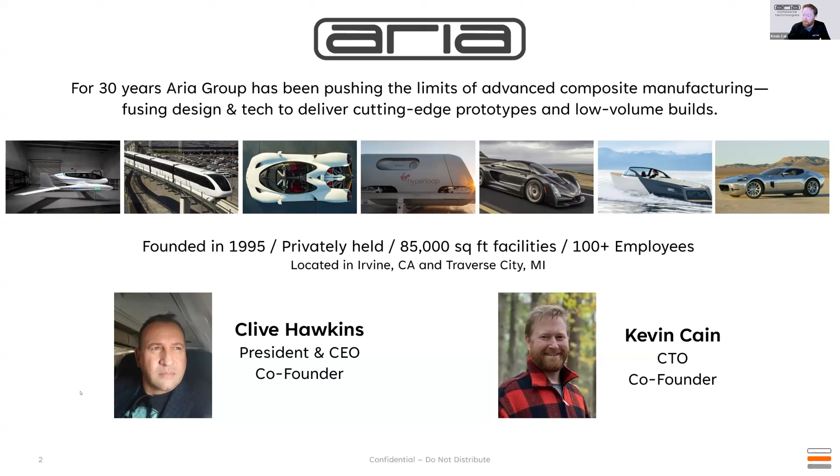Before I jump into what ACT, Aria Composite Technologies, is up to, I want to give everybody a little background on Aria Group and what we've been doing for the past 30 years.

In 1995, we founded, through Clive Hawkins and myself, an engineering and low volume manufacturing prototype manufacturing consultancy out there in Irvine. Some of our initial clients were like Panoz Esperante, a really interesting low volume aluminum intensive vehicle, the Rod Millen Pikes Peak race car. We did a lot of the design and manufacturing for the Las Vegas monorail. A large number of our early clients were the OEM automotive design studios on the West Coast, including the Honda SUT, Ford GR1, Mazda Furai.

Into the early 2000s, there was a lot of electric vehicle startups happening out in the West Coast, and we were a major resource and development partner for many of those firms. Really noticeable, the very first Tesla Roadster that existed in North America, we produced the body panels for that here at Aria Group. We worked very closely with Fisker throughout the years, Aptera, and again continued our close relationship with Tesla on the very first Model S hard model, also done at Aria Group.

In 2008, though, there was a pretty major setback to the automotive industry through the 2008 recession, and Aria Group pivoted. We produced a lot of interesting projects for the entertainment space, working with Hollywood out here in California. We did major big budget motion pictures, Avengers, Transformers, a number of large projects for that. But one that was really the most interesting and notable for us was our collaboration with Disney.

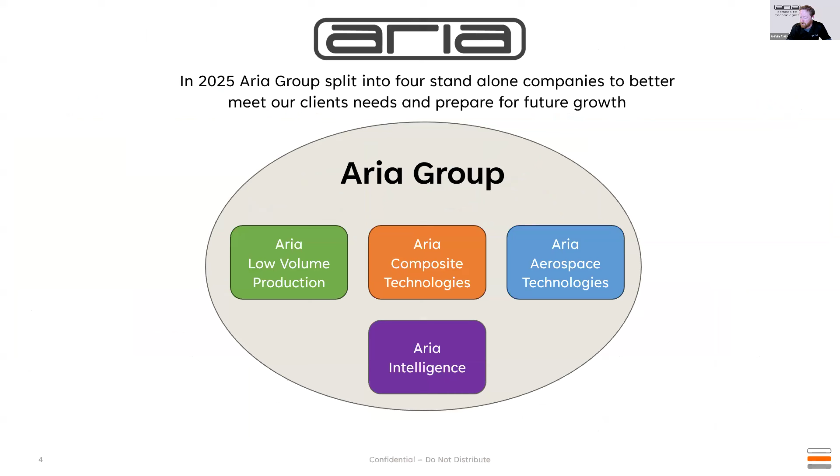So again, in 2025, Aria Group has split into 4 standalone companies to better meet our client needs and prepare for future growth. So we have Aria Low Volume Production, Aria Composite Technologies, Aria Aerospace Technologies, and all of these are backed by the Aria Intelligence, our own internal paperless communication system.

Within Aria Composite Technologies, we immediately have capabilities due to our 30-year history coming from Aria Group. So we have 20,000 square feet dedicated just to composite manufacturing in Irvine, California.

We have a large team already who's been working for decades in carbon fiber, fiberglass, hand layup, and prepreg infusion. We are very experienced in doing high quality finished parts, whether it be single runs or into the dozens to hundreds of components. We do our tooling design and manufacturing in-house.

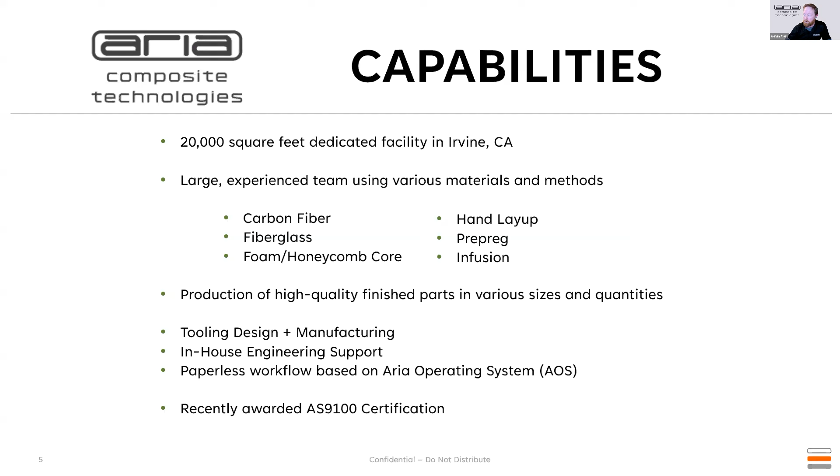We have engineering teams able to immediately provide engineering support. All of this is centered around our paperless workflow based on our operating system, the AOS. And in combination using AOS, we just recently got awarded our AS9100 certification, so that's looking to really expand our efforts in the aerospace industry.

We have like 9 5-axis mills, a CNC cutting table, and a strong relationship with Stratasys, so we have 3D printers on site. We've got a large format curing oven. We have a good sized autoclave, clean room, and a fully equipped surfacing and paint department.

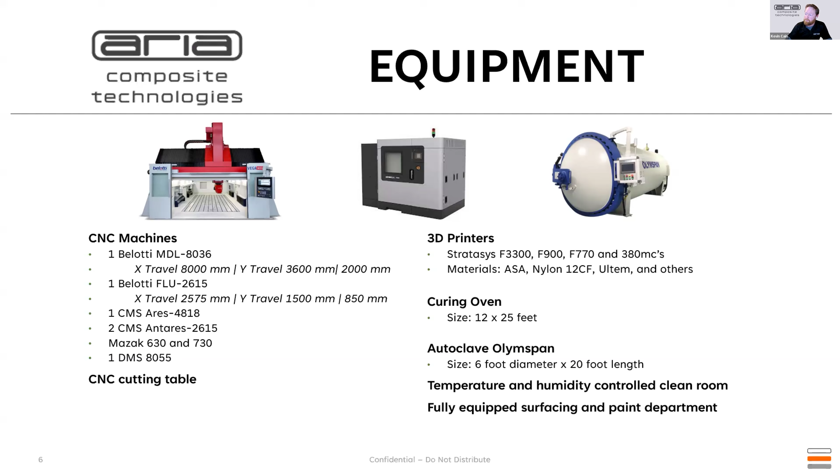But the mission of why we do this, why we've set up Aria Composite Technologies, is that our goal is to commercialize breakthroughs in composite research and development into scalable solutions that overcome the barriers limiting widespread adoption of composite manufacturing. So that's where we're really excited to be talking with other companies within IACMI over who has some unique manufacturing processes, some new technology. We really want to be your partner in finding the right clients for those and bringing it to market.

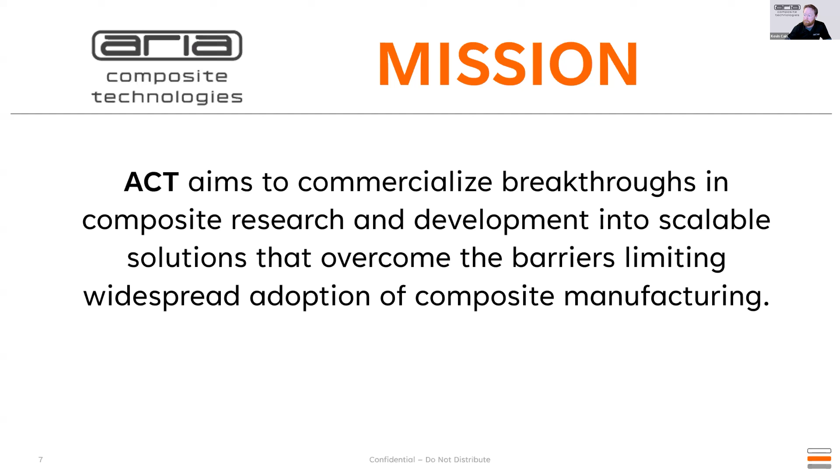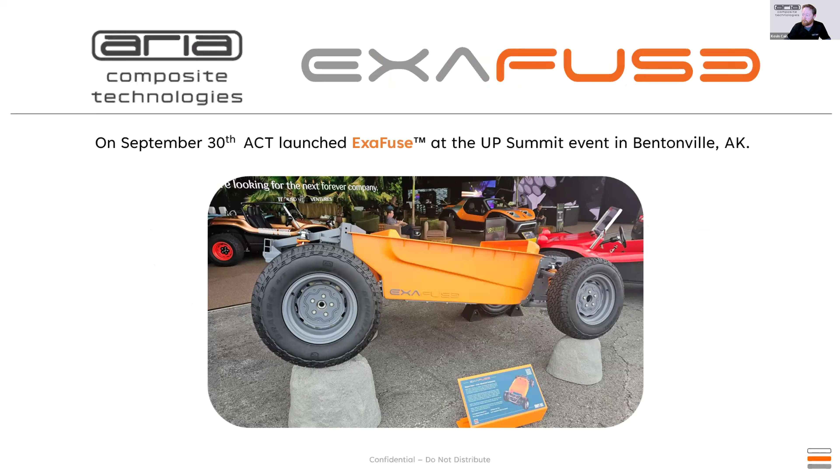Our first example of this is Exafuse. On September 30th, we launched our Exafuse process at the Up Summit in Bentonville, Arkansas. What you're seeing there is our proof of concept single monocoque tub that we produced internally using the Exafuse approach. Exafuse is just a breakthrough in composite manufacturing where we believe we're going to deliver high-rate, cost-efficient production of large integrated composite structures, leveraging ultra-low viscosity resins that provide a low-pressure, fast curing process.

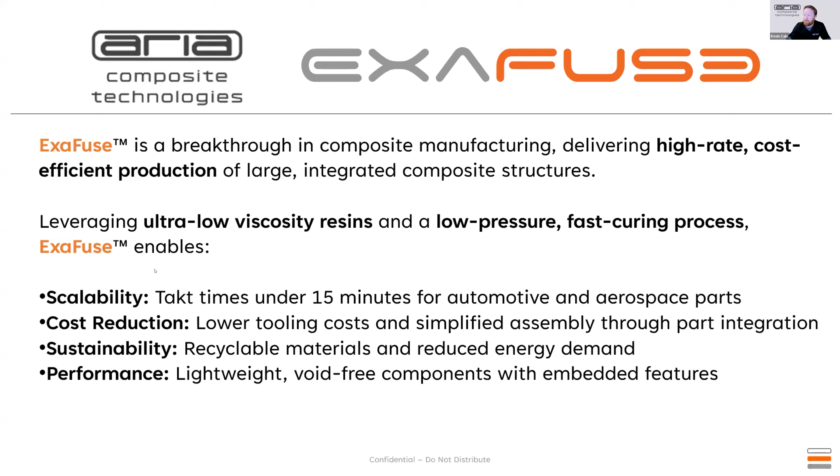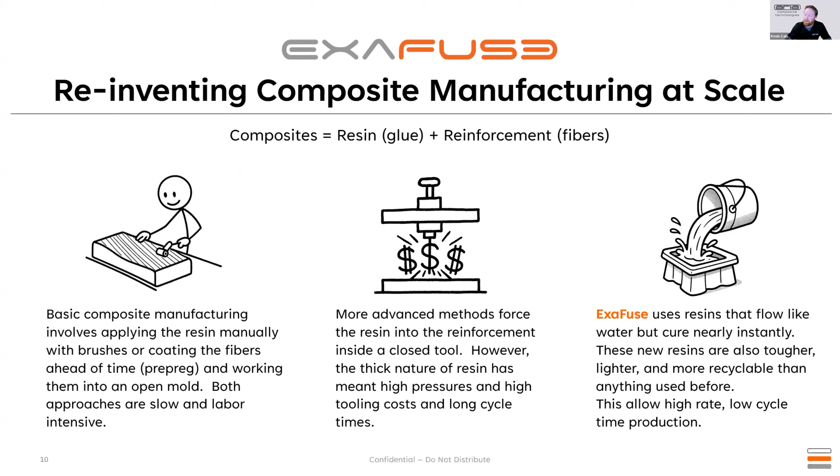They're tougher, lighter, and more recyclable than any of the thermosets that have been used before. And using that type of resin system really, what we're excited about, it unlocks true part integration. You can use these to achieve design freedoms that have never been possible before with advanced composites.

So what Tesla sort of demonstrated with the gigacasting approach of taking dozens of discrete components into a single casting, we're using that similar design philosophy to take dozens of discrete components and do it into a large format integrated composite structure, but without exorbitant capital expenditures into massive presses or tooling.

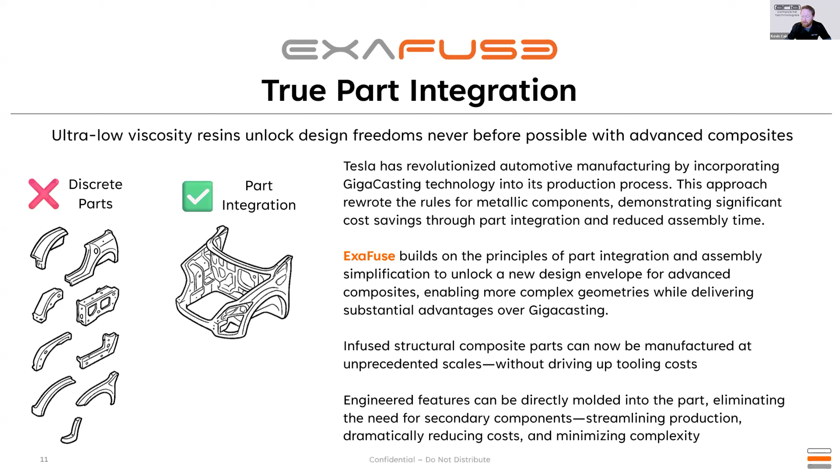And also that's unique with the low viscosity resin systems. We can do secondary features of ribs, bosses, molding clips directly into the resin system that's integrated in the same molding step as you're doing the composite reinforcement.

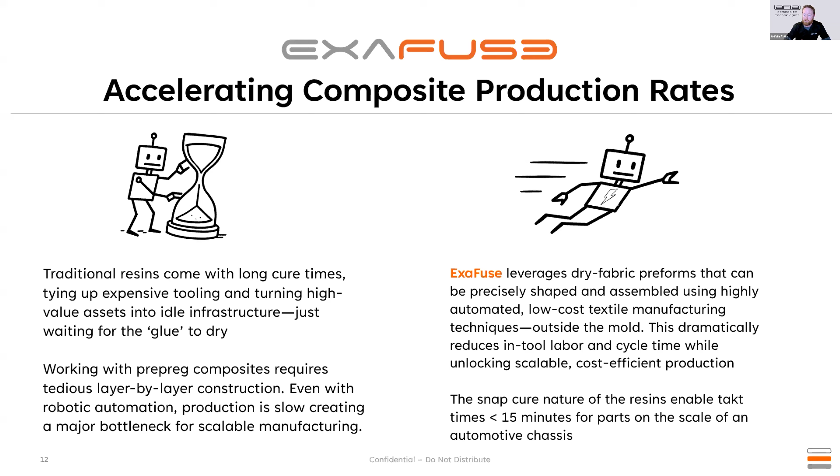So all of this is going to accelerate our production rates. We're looking to achieve production rates in the thousands of parts per year. And a lot of that's also going to rely on dry fabric preforms. That's going to be key to material handling because we're looking to have automated roboticized material handling to go through, and so the entire takt time should be under 15 minutes to produce a large tub as we saw with that initial proof of concept.

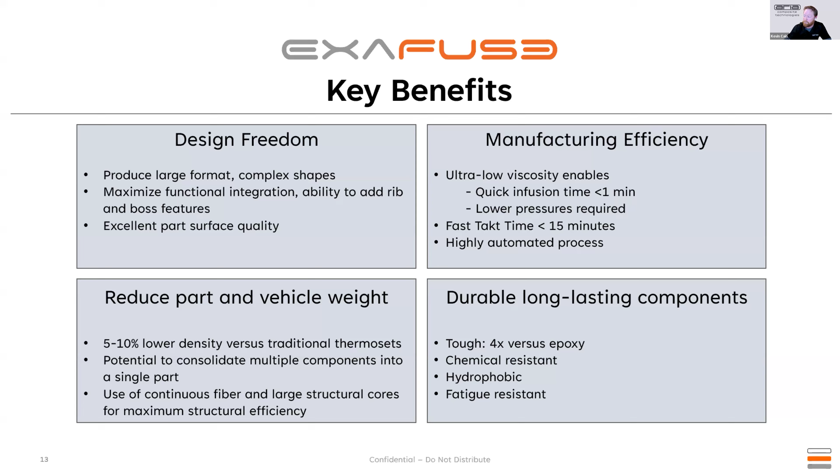So just kind of reiterating what our ExaFuse's benefits are: design freedom, really large format, complex shapes. You do achieve an excellent part surface quality right out of the mold. Its infusion times can be less than a minute. Lower pressures are required. It's a highly automated process, and it's still a very tough system. It's fatigue resistant, and so again, we're really excited about the benefits that we're seeing with this, and that's due to our strong collaboration with ExxonMobil.

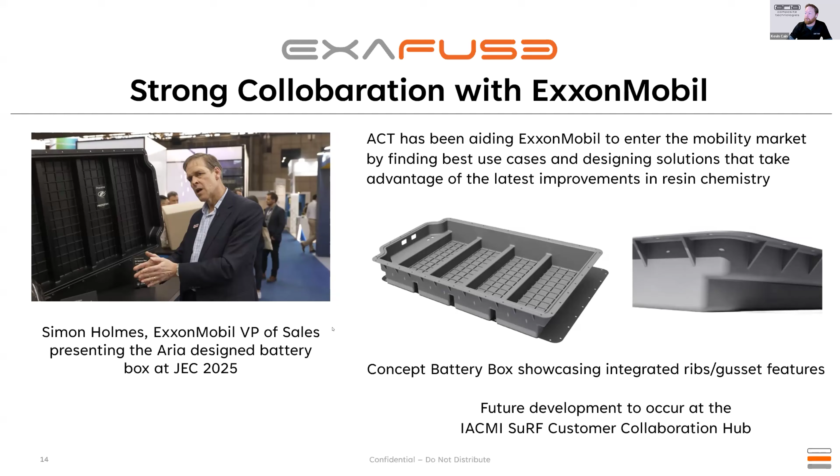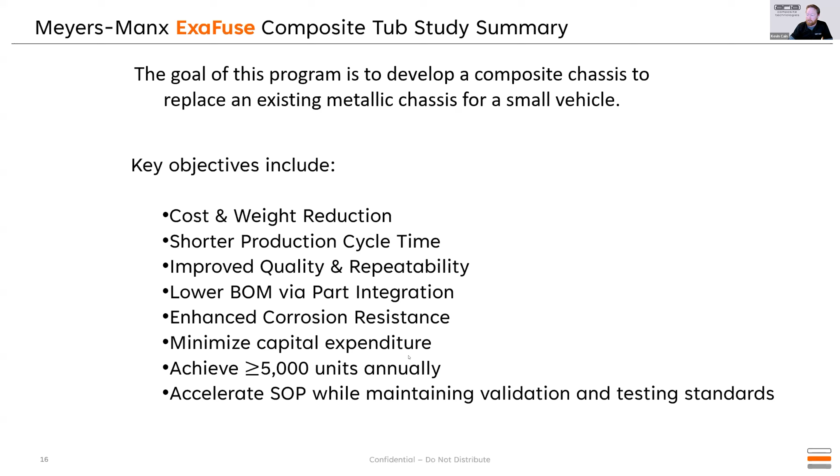Looking at the specific tub that we did for Meyers-Manx, our objectives were to reduce cost and weight for the program, shorten production time, lower BOM count, still have enhanced corrosion resistance, minimize capital expenditure was a key part of our study, and achieve over 5,000 units annually.

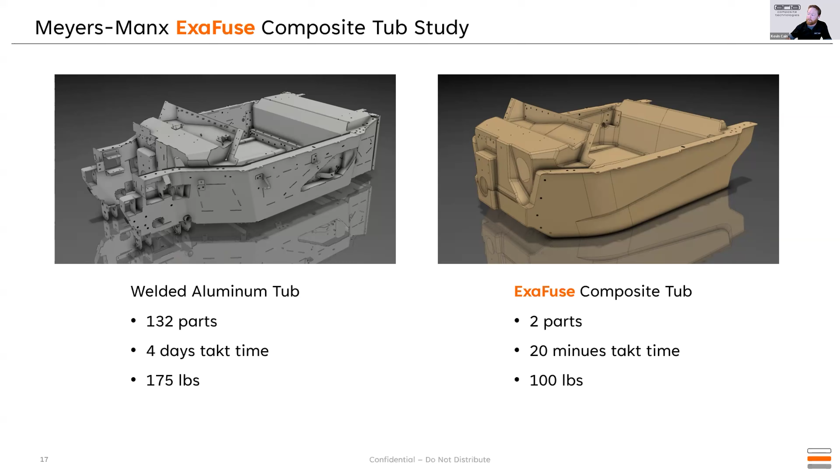We were starting with them with a welded aluminum tub. They were using flat laser cut aluminum sheets to be tabbed and slotted. It was very low capital investment, but it took 4 days takt time, a lot of manual welding, over 175 pounds. We were able to combine that down into just a firewall and tub, just two parts. Before even using our prototype tooling, we were seeing like a 20-minute takt time, and it got a weight reduction of 75 pounds. We were able to bring this whole assembly down to 75 to 100 pounds.

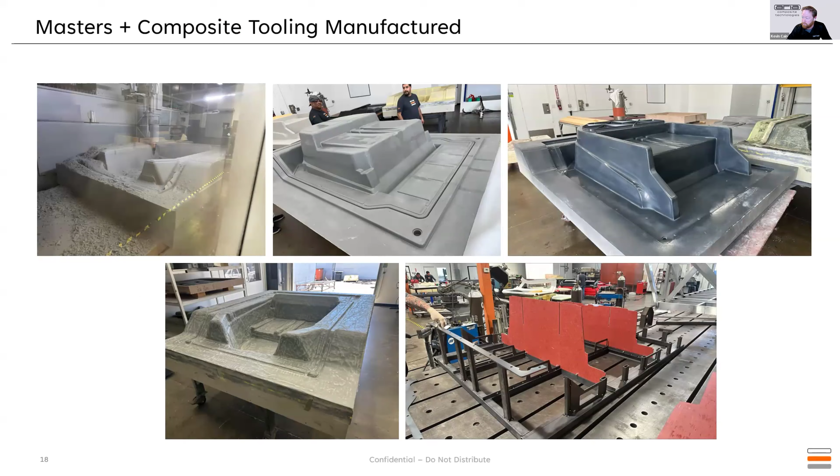These are some photos demonstrating internally our tooling process, machining the masters, polishing the masters, prepping them, to doing the composite molds, reinforcing the molds, and that achieved us this, our very first trial with the full-size tub. It's around a 15-minute infusion, and using this resin system, it requires about an hour cure, but we'll be looking at production systems which have enabled a snap cure process.

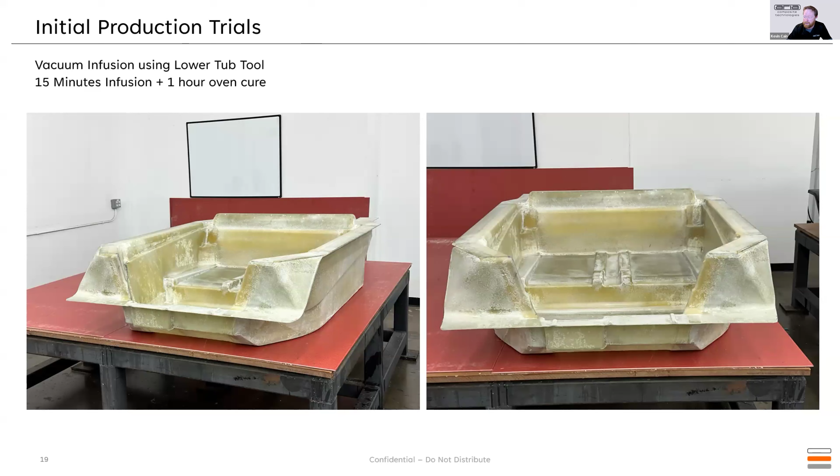Here are a few additional photos showing the finished component. This is again our initial proof of concept tub that we've done for Meyers-Manx. They're our design partner as we're working through this program. We're all very excited about the result of this.

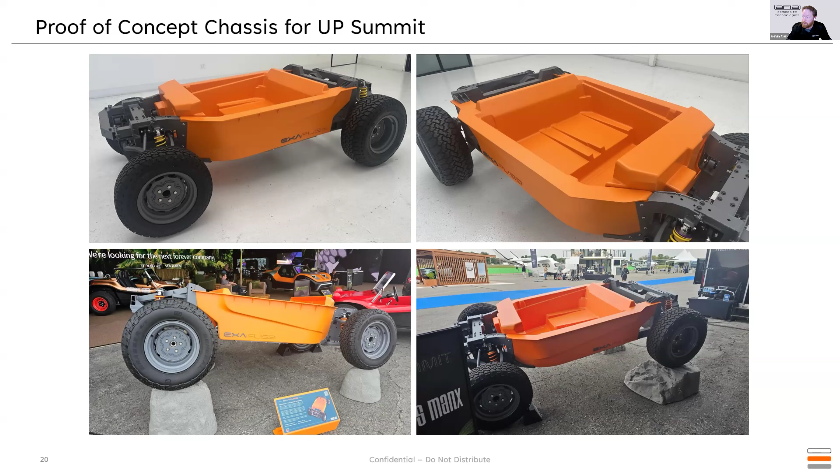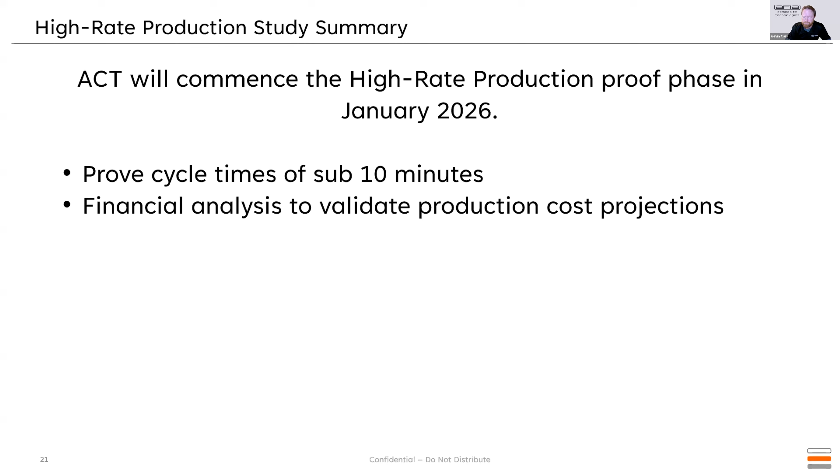Extremely, extremely promising. So in 2026, we are going to be moving from this proof of concept into a high rate production proof phase. We're going to demonstrate our target cycle times of less than 10 minutes end to end, and also have our financial analysis that really validates our cost projections.

So again, ACT is looking to commercialize new advances in composites research. I'm asking any IACMI members, anyone else out there, if you have technology that you think that ACT can help you demonstrate and bring to market, please reach out and contact me.

It looks good. We just need you to come off mute. Oh, you're still on mute, Ted. Oh, is that good? Yep, we can hear you. All right, sorry about that.

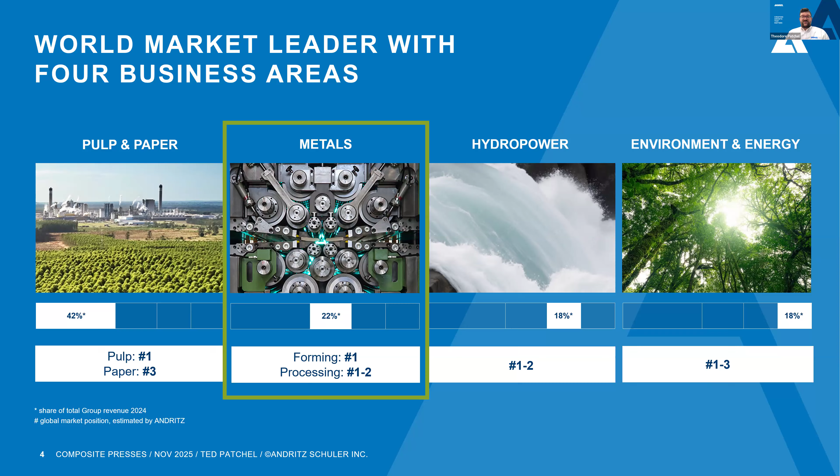What this means for us is that we have greater access to the many resources of the Andritz Group in its portfolio, which has already proven to be beneficial in advancements in both our digital technology solutions and our battery department. Andritz Group is an international technology group headquartered in Austria with a strong foothold in pulp and paper, hydroelectric power, green energy solutions, and our division, which is metals. Schuler makes up approximately 80% of the metals division and holds a strong position in the press market.

Within the Andritz Group is a vast network of companies and locations that span the globe. This includes over 30,000 employees in over 80 countries. This network has allowed us to consistently stay close to our customers and to gain additional perspectives. Within the Andritz Schuler Group itself, we have a vast network of manufacturing and engineering facilities, and these facilities and our customer relations are heavily strengthened by our extensive service network.

We offer regional service support located across the United States, and we have also recently acquired an office in Canada. This allows us to respond and deliver quickly for any issues that may arise and to support modernization projects on older press equipment. On Michigan Avenue, near our Canton, U.S. headquarters, we have a service shop that includes a pit and is capable of manufacturing and servicing spare parts and press repairs. As many of you know, our service team is currently working out at the IACMI SURF facility to reinstall that 4,000-ton short stroke press.

I will now dive into the main press designs that we have for composite applications.

While each project that we undertake is unique, the majority of composite presses that we produce fall into one of two categories. The first is a classic long downstroke press. These presses are very similar to ones that we produce for automotive stamping, for deep draw, and for a multitude of other non-specific hydraulic press applications. The second style is the compact upstroke press, the one at the SURF facility, and it utilizes a locking mechanism for the upper slide and creates the compression stroke from underneath.

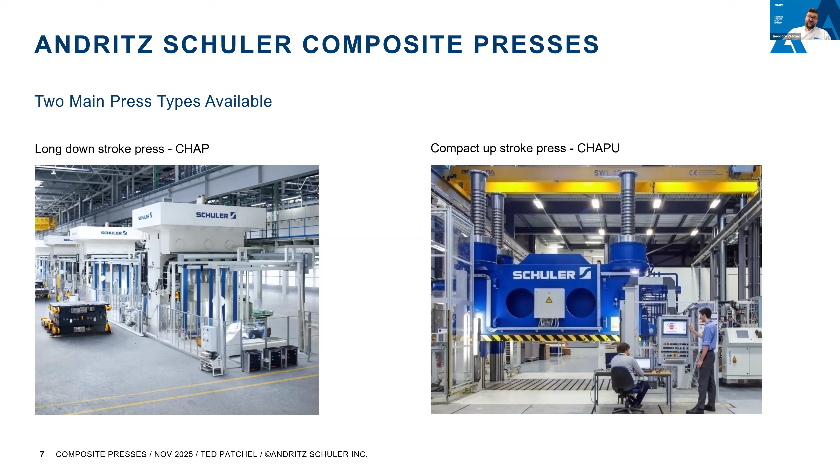Here you can see the stark differences between these two styles of press. The classic composite press on the left has a hydraulic system and the accumulators all stacked above in the crown, whereas most of this is contained in the pit on the compact design—I apologize for the cutoff section of the picture. While they both utilize slide cylinders to open and close the mold, the classic press uses these for the entirety of compression force, where the short stroke press has all the cylinders underneath. Both press styles are extremely flexible in table size and press force and can be adjusted based on the die requirements.

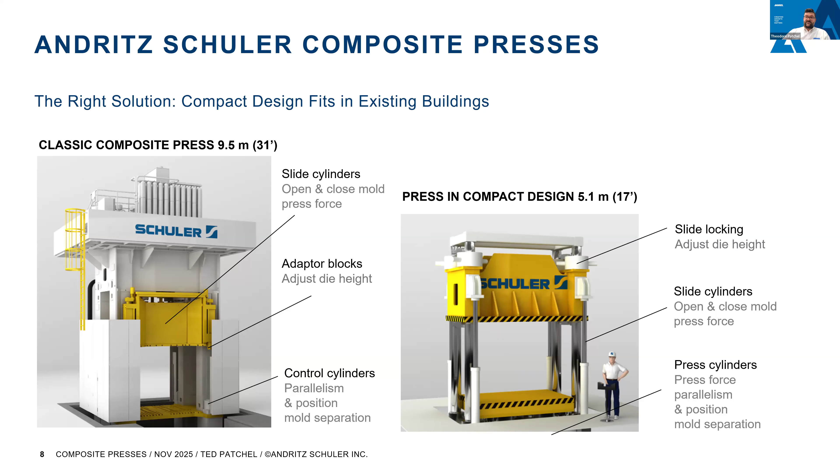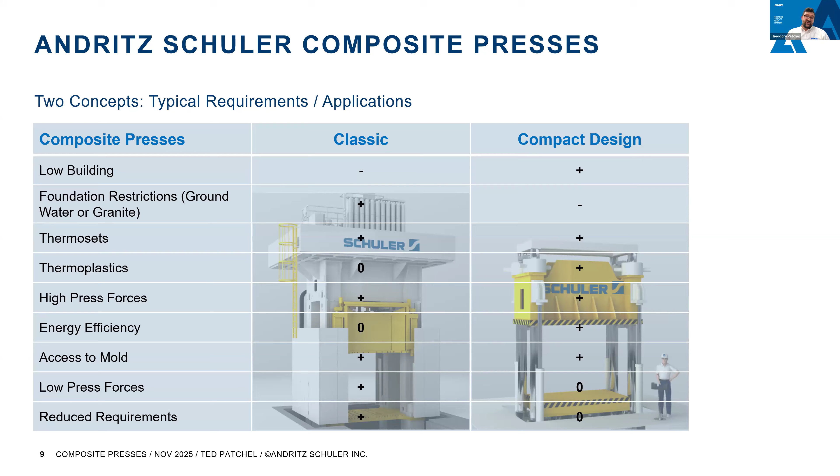Of course, both press styles have their pros and their cons. The classic functions very well over a full spectrum of press forces, but is not ideal for thermoplastic applications or in buildings with lower ceilings, as the crown takes up a lot of space. It is also less energy efficient than the compact design. The compact design functions well for both thermosets and thermoplastics due to its quick closing speed, but it does require a very large pit foundation. It is also not as efficient when you get into the lower tonnages, around 800 tons and below.

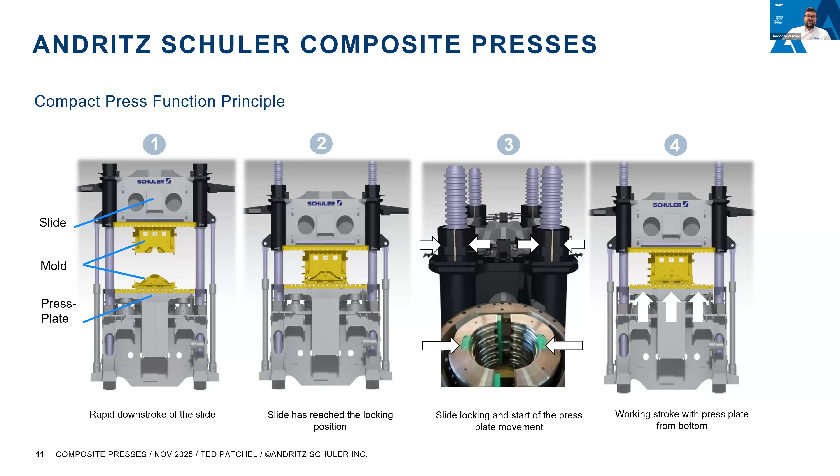Some additional benefits to the compact short stroke press are the ability to produce quality precision parts utilizing an adaptive congruent bending lines and parallelism control. The adaptive technology also allows us to change molds quickly without any additional modifications. The rapid travel of the upper die allows us fast closing speeds.

This combined with a short pressure buildup time creates a system that is effective for thermoplastic applications. Our position indexing and parallelism controls are highly precise, and adaptation is not required based on the mold's height. From an operating cost standpoint, the short travel of the cylinders creates a more efficient production with significantly less oil compression, and we can utilize selective cylinder operation to further reduce your energy costs.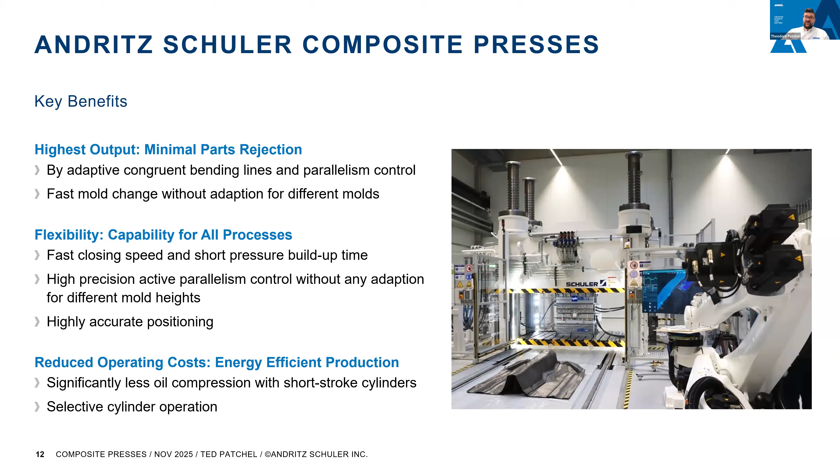Here are a few examples of some multifunctional compact presses. These are the short stroke presses designed for R&D departments across the globe. We have one in England at the NCC. We have one at Aachen Center for Integrative Lightweight Production. Of course, the IACMI press. There's an OEM in Korea utilizing it for R&D, as well as UNIST in Korea and Asglawo in Germany.

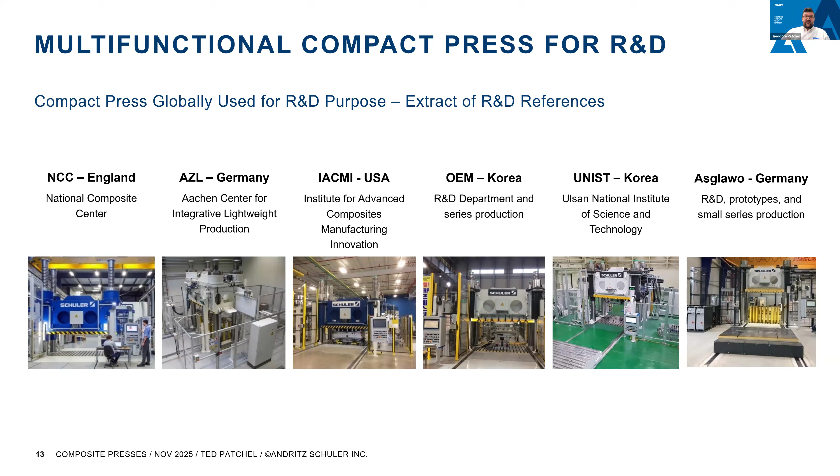Here at Andritz Schuler, safety is a main priority for us. Our builds exceed many standards and regulations, especially when combined with a mold scanner. We can create different safety zones to detect people anywhere inside of the enclosure. We also prefer to install a transparent enclosure with access doors and light curtains in place. With the transparent enclosures, it allows you to have full access and sight of the mold without putting anyone unnecessarily at risk.

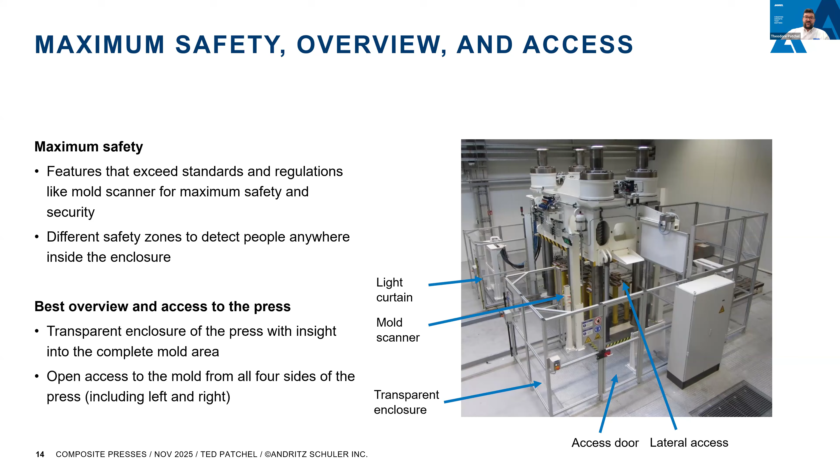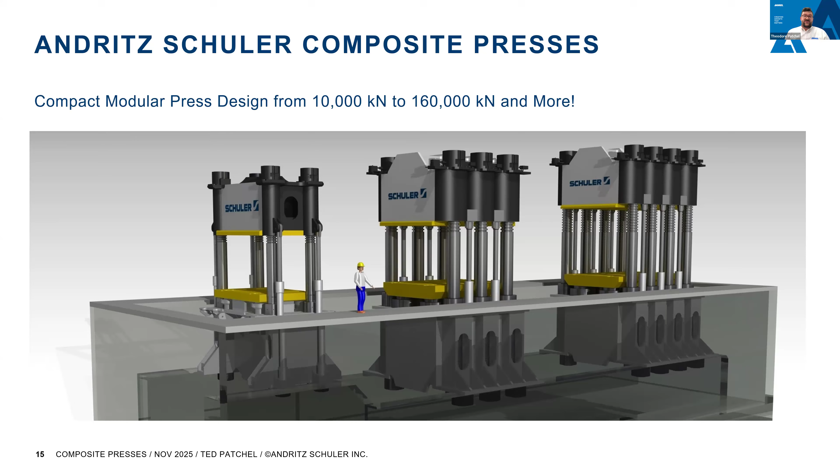Here is an example of the modular design of the short stroke compact press. Because of this, we are capable of expanding the press size with a reduction in the engineering costs overall for the larger presses. The largest one that we have produced currently is 16,000 tons, but we do have further capability for expansion if somebody's project requires it.

Now I will get into the congruent bending lines. With the traditional non-congruent bending lines press structure, the deflection of slide and press plate are curved in opposite directions. This creates limited control on the part thicknesses, and it increases the thickness in the center of the press. Using our innovative adaptive congruent bending lines, we are able to achieve wall thicknesses with increasingly tight tolerances and capable of optimizing the bending lines per stroke. This technology has been adopted on 17 presses currently, and some more that are under production.

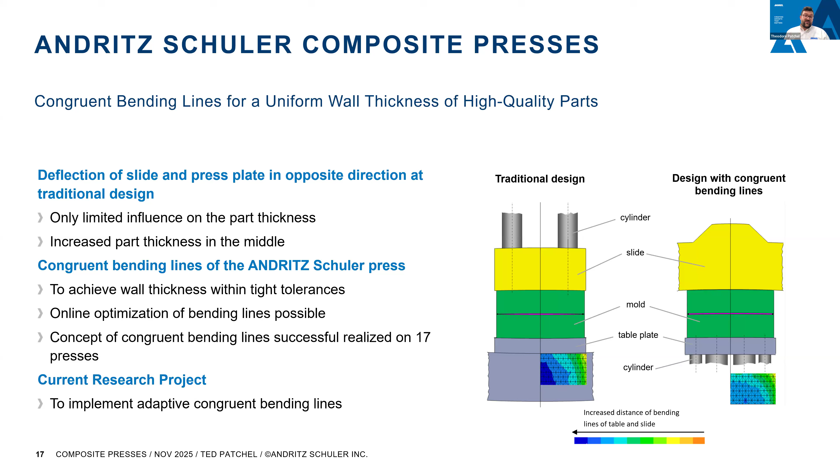In these graphs, you can see that the displacement against nominal becomes significantly skewed the further out you get from center without using the congruent bending lines. With the congruent bending lines, you see that your finished part ends up much more in line with the desired outcomes.

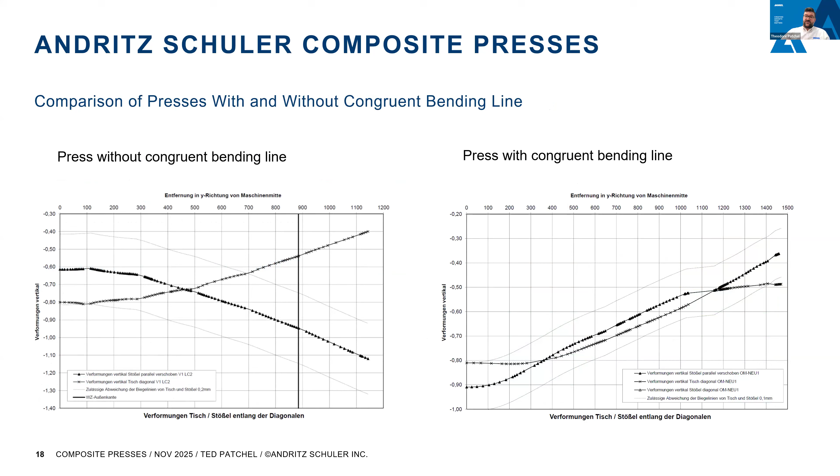We did a case study regarding these congruent bending lines with an automotive OEM's floor pan, and we were able to modify the original wall thickness that was 2 millimeters by 0.25 millimeters, which was able to achieve a greater lightweighting without any reduction in parts lost due to tolerances. This study also proved that this technology can be adapted and used for part production.

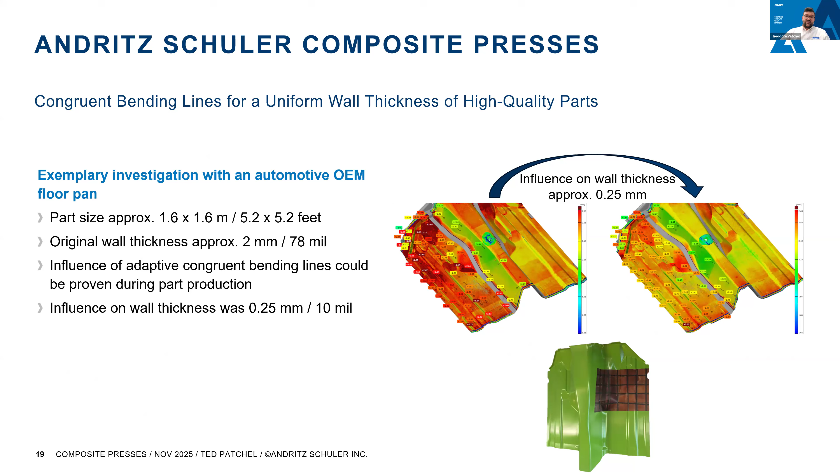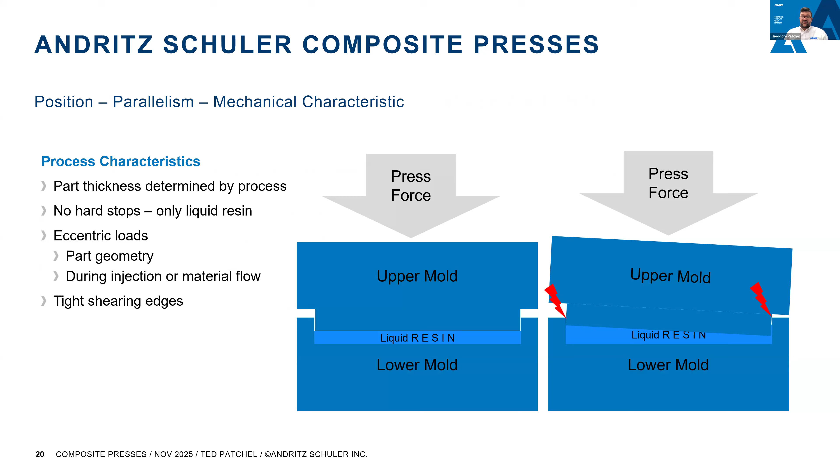Another important technology for our precision presses is the parallelism. Utilizing our parallelism controls is extremely important for the composite press production. With these, we are able to press parts without using hard stops, and we can avoid any issues due to an eccentric load condition, which is nearly unavoidable to have an eccentric load in the composites. This allows us to create tight shearing edges and produce precision parts.

These systems create a closed loop of control for both position as well as parallelism. The positional indexing is done for the injection of resin or coating through encoders in the mold that are programmable. They're capable of mold weights of up to 90 metric tons with an accuracy of 0.05 millimeters.

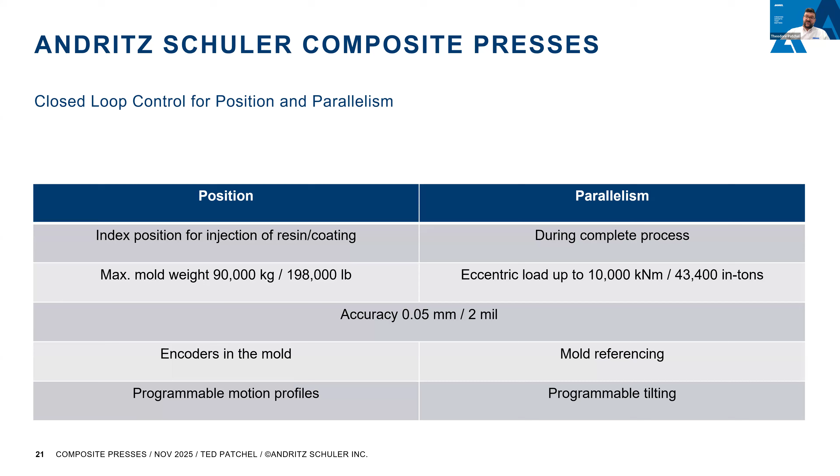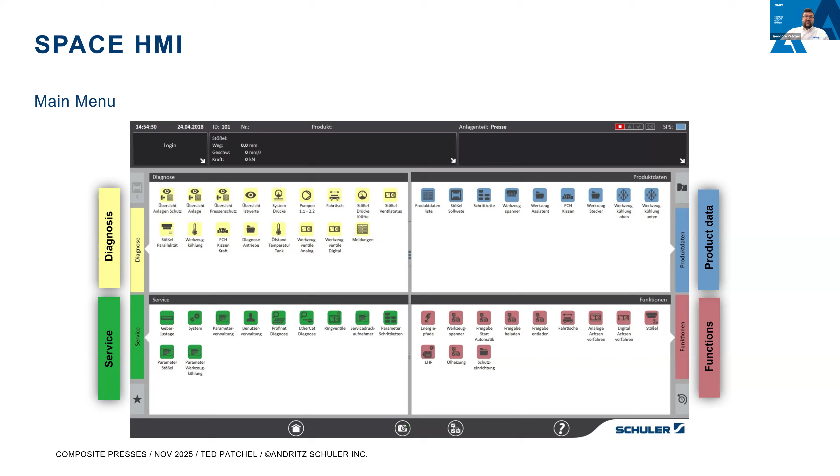Alongside these, we have our HMI technology. This system can be used for a variety of functions, including diagnostic testing and product data. Here you can see an example of our diagnostics page with these easy to read dials that can show you where your issues are arising and can help you to root cause any problems that you have.

With this compilation of data, we have a data inspector that can be integrated into the HMI of your system. This inspector allows you to record up to 100 unique digital channels, and you can compare these functions with its powerful graphic data analysis, which is shown here in the picture. Any and all of these readouts can be logged and exported as CSV files, so you can archive them and utilize them for any root cause and tracking situations down the road.

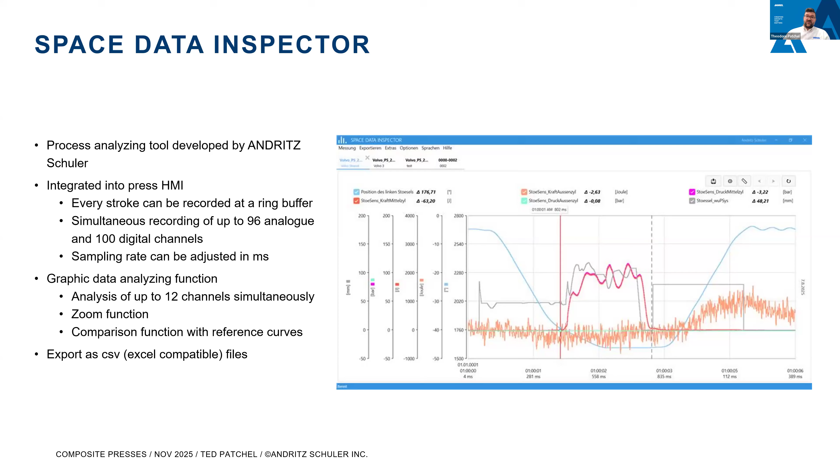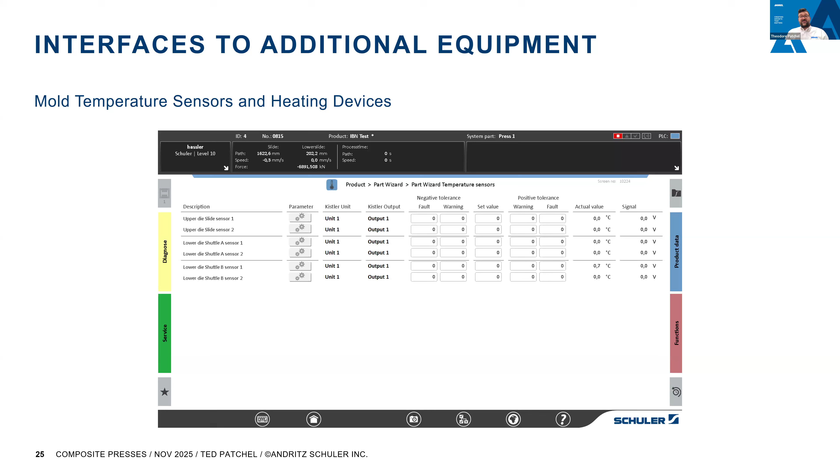Some additional examples of equipment that can be added to our Space HMI system include mold temperature and heating devices. These can also be used in tandem with our vision systems or additional applications that you may have.

Now I will go through some turnkey composite manufacturing lines that we've produced recently, as well as a collaboration with FRIMO.

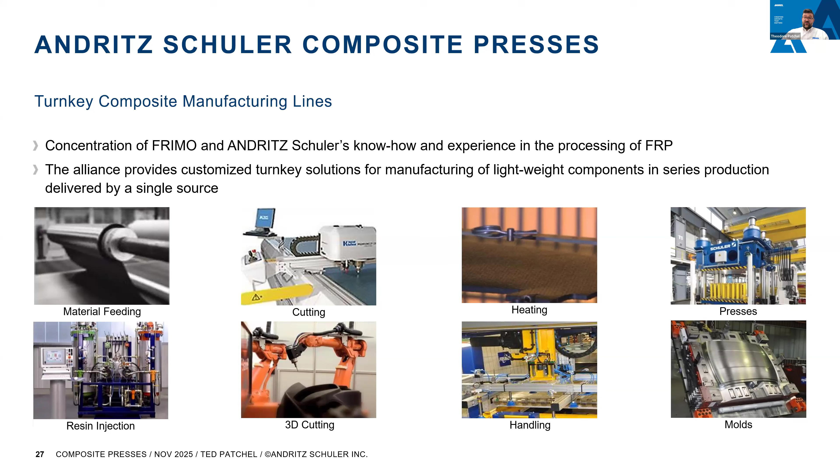Turnkey lines for composites can be quite complex. There's a multitude of processes and applications, I'm sure most of you are aware of. Due to this, we have been working very closely with FRIMO in Germany. We have a strong partnership with them, and it has helped both parties produce cutting-edge solutions for turnkey lines. FRIMO has expertise in front-of-line and end-of-line equipment for composite production, and combining that with our press abilities allows us to create complex composite manufacturing lines together.

And in action, here you can see a wet compression molding and high-pressure RTM press system with the Schuler compact short stroke press. And from FRIMO, we have the epoxy high-pressure RTM and wet compression molding metering unit, as well as their robots for resin application.

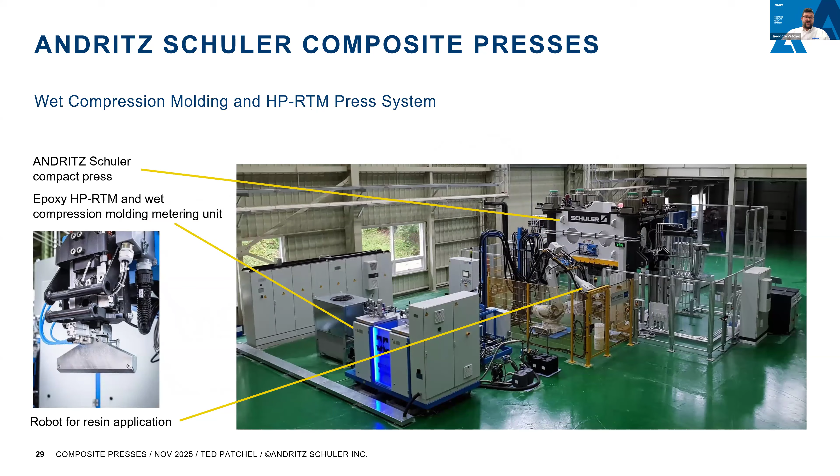Another recent project that we have included in the high pressure RTM workspace is 11 production lines for an automotive OEM over in Europe. Each of these lines is capable of producing 25,000 parts per year with an approximate 6-minute cycle time, and these all include an automatic tool change for quick die changeovers.

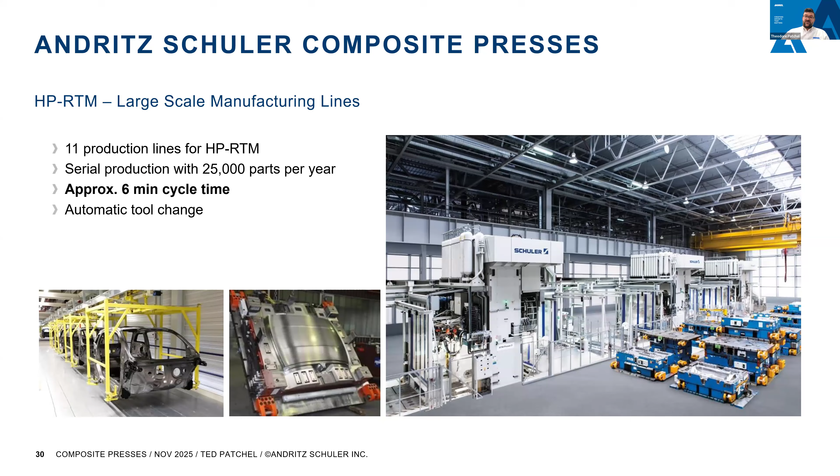One quite unique project that we are very proud of over here in the United States is a 16,000-ton composite press used for special composite tanks. The customer reached out to us looking to replace their injection molding system and possibly speed up their production. So we created a unique application where the material is put on the die while the bolster is moving, and due to this, we were able to reduce their cycle times and increase the output.

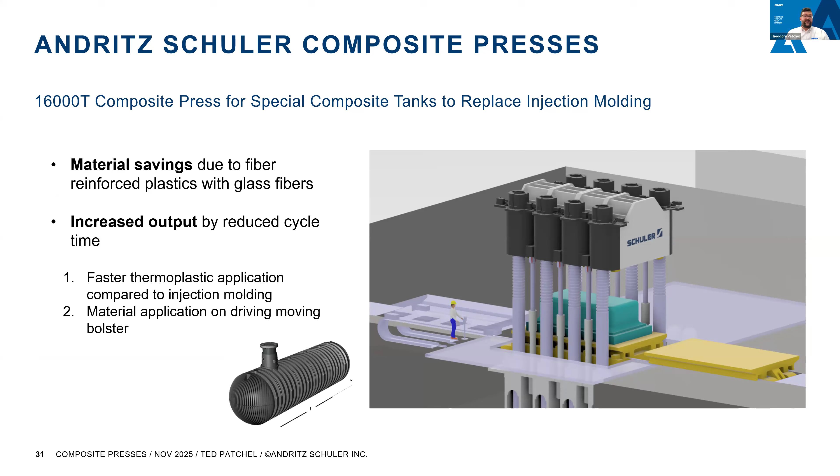Another recent project over here in the US is a set of 16, 3,600 metric ton composite presses. These presses were all customized specifically for the customer and include a great case study of our VDP technology. That's visual die protection - a vision system on each press that analyzes any changes that are inconsistent with the production process. You can set how sensitive they are, and they will shut down and save you from expensive die repairs and bad parts. There are many applications, but we found them to be extremely effective, and I think they're going to be used much more in the future.

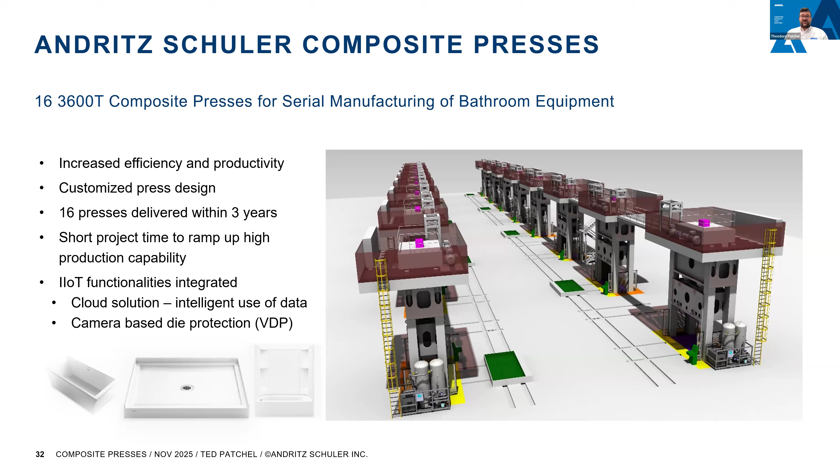The largest would be the 16,000, but I don't see that as a limiter. We could build a larger one if we needed to. So what would be the limits as far as tonnage as well as die area? It's a good question. Unfortunately, I don't have that answer for you right now, but I'm more than happy to go talk to our engineers and see how far we can push it, and then I'll let you guys know.

All right, well, thank you, I appreciate it. And with that, let's go ahead and turn over to David, our last presenter. David has an interesting project he did for Ford in the past that I thought was really exciting, and so I thought the audience would enjoy hearing about this technology.

David? I'm happy to share my slides as soon as Ted releases. Ted, if you wouldn't mind, stop sharing.

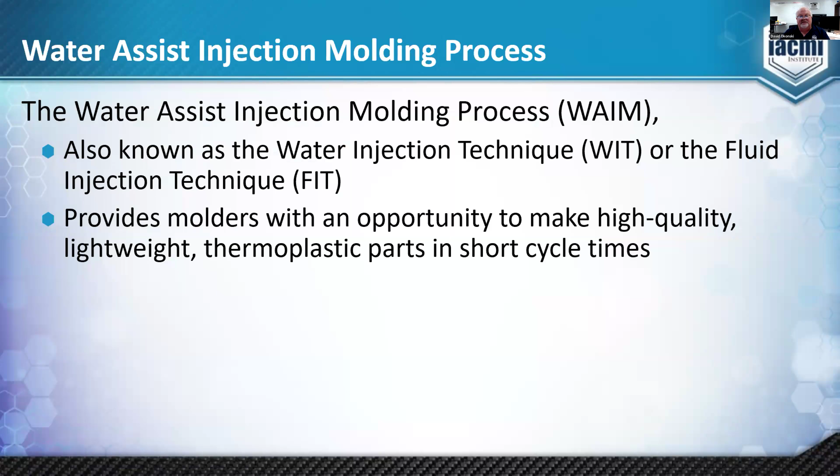So water assist, known as WAIM, also known as water injection technique or fluid injection technique, is a specialized injection molding process that provides molders with the opportunity to make high quality, lightweight plastic parts in relatively short cycle times.

It is a specialty injection molding process where a polymer melt is injected into a cavity with the subsequent injection of an incompressible fluid, in this instance water, into the molten core of the part to create a hollow section. It is very similar to the gas assist injection molding process, but it offers a significant reduction in cycle time of up to 70%.

When you think about that, with the water, which is cooler than the melt temperature of the thermoplastic, you're cooling the polymer wall, not only from the core but from the mold itself. So you're increasing your flux.

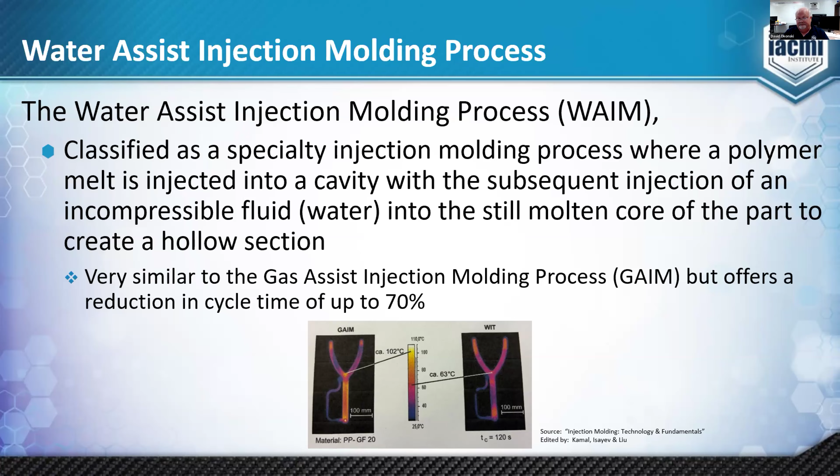Water assist can be used for elongated parts with diameters of 30 to 35 millimeters. It can eliminate the sink of ribbed parts, so you can eliminate the read-through of a rib in a Class A surface by hollowing out that rib and lessening the volumetric shrink. And it can create flat parts with integrated thick and thin-walled sections.

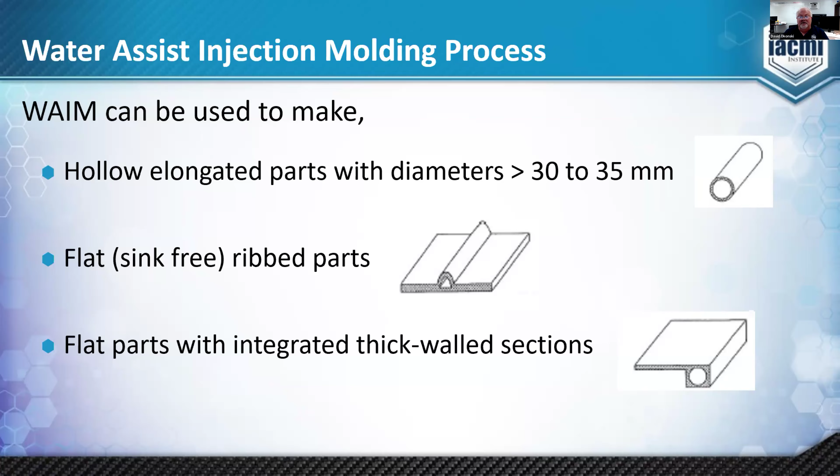The advantages of water assist include a reduction in your cooling time and cure time, which can shorten your overall cycle time. You have material savings because you're creating hollow sections, and you have the potential to reduce clamp force, particularly if you use the short shot method to the water assist approach. I'll talk more about the short shot method in a few slides.

You increase part quality by reducing sink, shrink, and warp, particularly warp, if you're able to uniformly distribute the residual stress in the part over the entire part. And you improve the weight-specific mechanical properties because you are hollowing sections and creating geometric stiffness.

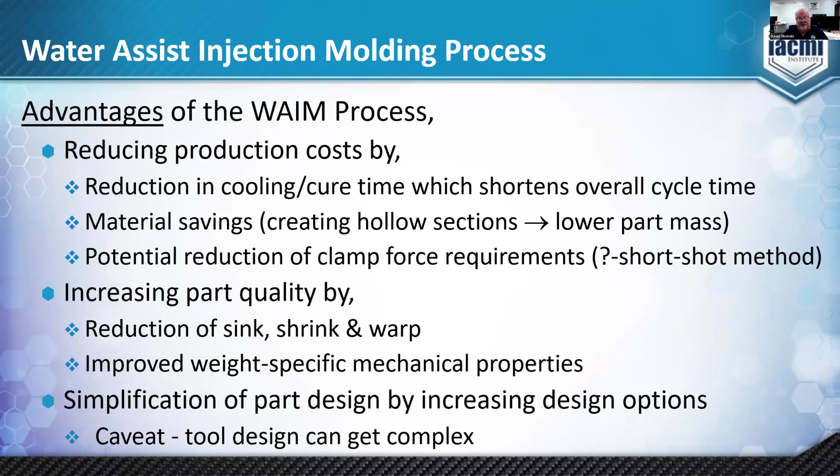The simplification of part design gives you increasing design options, so you can design your part to go from thick to thin sections, not your conventional thin to thick. It gives you a little design freedom. The caveat is your tool design can get complex, because you might have to incorporate flow leaders to create the hot cores that are hollowed out.

The disadvantages of the water assist process: there's cost. You'll have licensing fees for the different units you may purchase. You have the cost of the water injection plant, the equipment, and the controller to deliver the water either at constant pressure or volume. And you'll have added maintenance of the water injection systems, which you'll have to keep up and running as best you can.

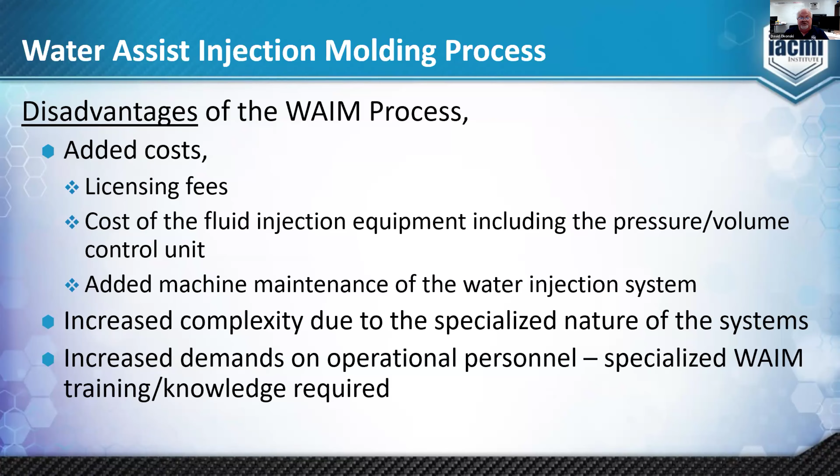It is, again, a complex system due to its specialized nature, so you're going to have to train your plant personnel to deal with the water systems.

The complexity comes in the water injection systems, which come in a variety of configurations that deliver water either at constant pressure or at constant volume. In constant pressure, you have two types of systems: one that uses an accumulator and another that uses hydraulic pumps. In constant volume, you essentially have a hydraulic cylinder that delivers a set volume of water to the injectors.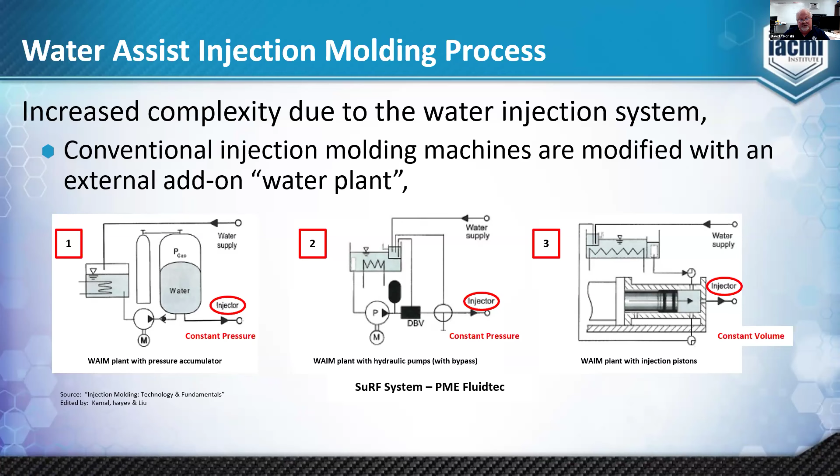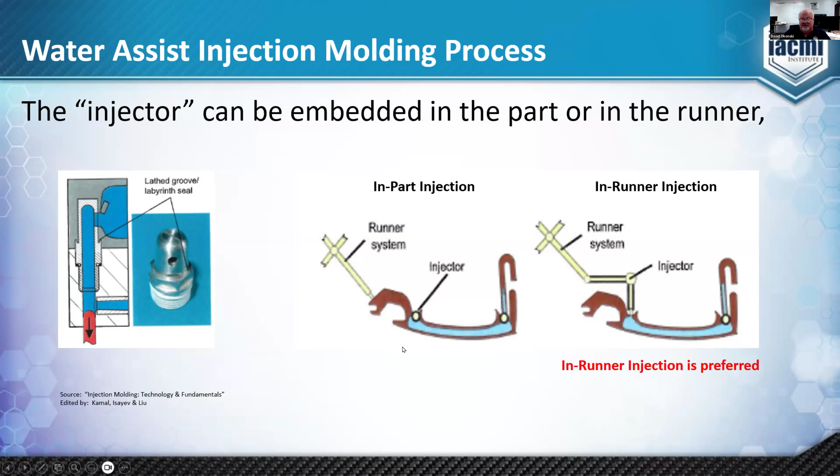Each of the systems delivers water to an injector, which could be a nozzle located in the runner system or in the part itself. The nozzle can be rotated to shut the water on and off, or it could essentially be a pull pin, where you pull the pin to release the water and re-engage it to shut the water down. It is preferred to place the water injector in the runner system so that you minimize cosmetic defects to the part surface, particularly if you're going for a Class A finish.

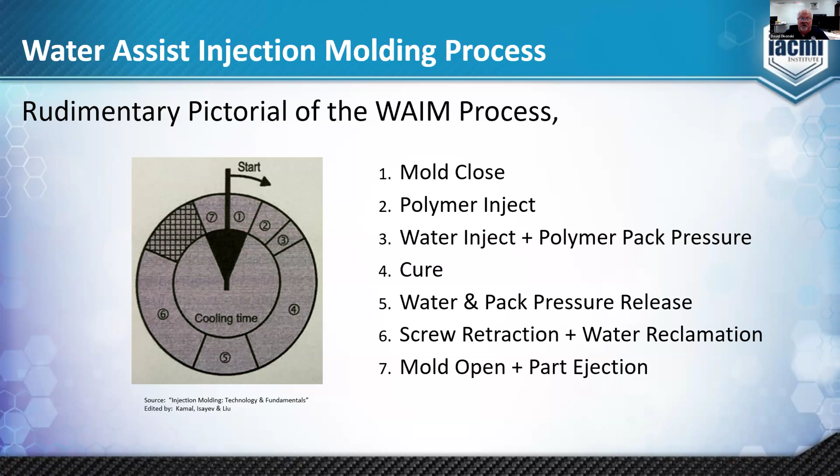So a rudimentary pictorial of the water assist process: the mold closes, you inject the polymer, and at some point in the injection, you inject the water. You then apply a pack pressure through water or the polymer, and let the material cure in the tool. You release the water and pack pressure, and as the screw retracts, you reclaim the water from the cavity, the mold opens, and the part ejects.

So the water assist system can be done in two types of methods, the short shot or the full shot. I'll give you a little more detail on each of those processes.

In the short shot process sequence, the mold closes, and the polymer melt is injected to partially fill the cavity to 50 or 90%. The caveat is you have to inject a sufficient amount of polymer melt so that when you start to inject the water, you don't get the water to blow through at the flow front of the melt stream. At this point, the ram is not bottomed in the injection phase. The water is injected into the core of the polymer in the cavity. The water takes the path of least resistance, with water pressure typically ranging between 4,000 to 7,000 psi. It's the advancing water front that pushes the melt flow front forward to fill and pack the part. The part cures under water pressure, with no applied polymer pack pressure. As the screw retracts, the water is retrieved, the mold opens, the part ejects, and the cycle is ready to repeat.

In the full shot process, the mold closes and the polymer melt is injected to completely fill the cavity. It's more like the conventional molding process, filling to 95 to 98% of full before you start to release the water. The ram is not bottomed because you're still using polymer pressure, hydraulic pressure, to pack out the part. Water is injected into the core and takes the path of least resistance, with water pressure between 4,000 and 7,000 psi. The water pressure supplements the pack pressure to eliminate sink on the surface of the part. The part cures under water pressure as the screw retracts. The water is retrieved just before the mold opens, the part ejects, and the cycle is ready to repeat.

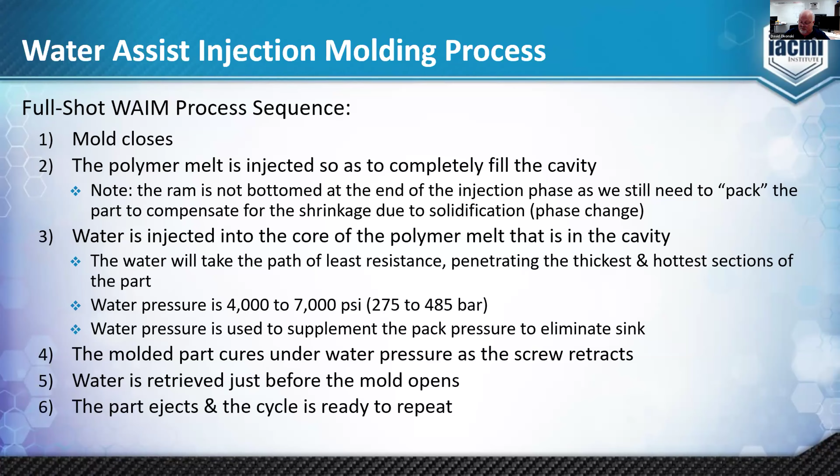There are several variants to the full shot water assist process. As you inject water into the polymer melt, it displaces material from the core, and that material has to go somewhere. In one variant, there's an overspill cavity where the melt exits the actual part into an additional cavity, creating volume for the water to fill. You can also have a melt pushback method where the water is injected at the end of the flow, pushing the excess melt back into the plasticizing unit. You can use this technique if your polymer melt is hydrophobic.

In the case of nylons, where it likes water, you really wouldn't want to do this type of process. You can also do a full shot with a core pullback. As you fill the cavity, the polymer melt fills the cavity, and you can release the cores, pull them back, and that creates the volume for the water to be injected and expand and hollow out the cores.

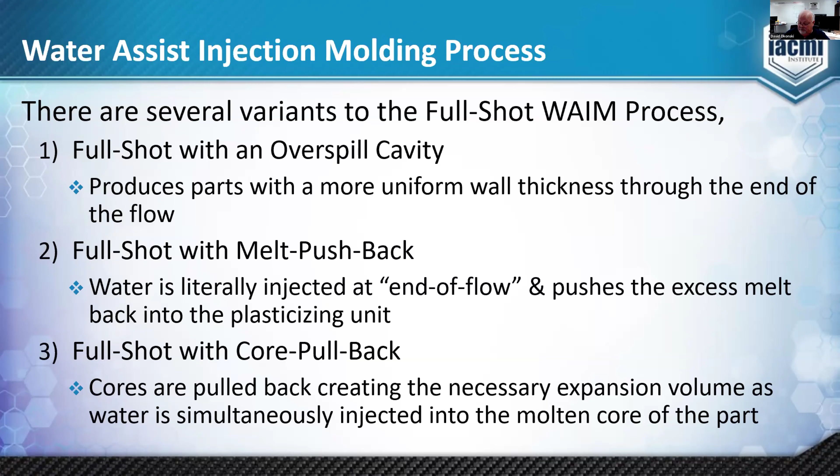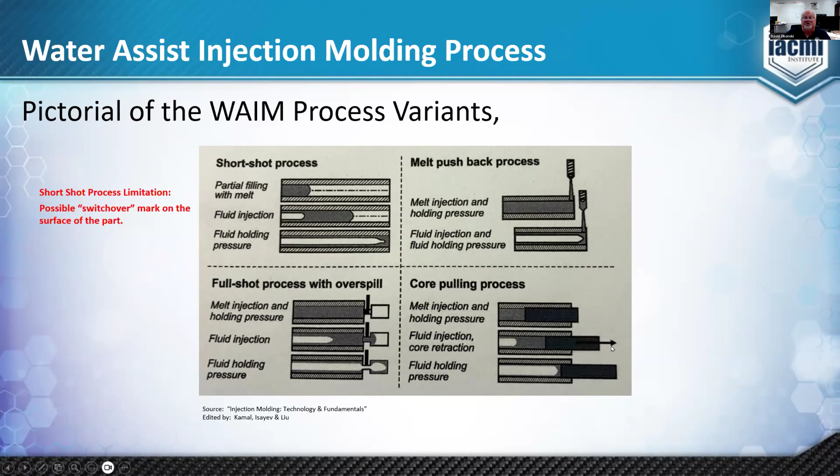The full shot process with the overspill cavity is in this quadrant. You're filling the cavity, injecting water, which pushes the polymer melt from the core into the overspill cavity, and then holding both with polymer melt pack pressure as well as water pressure. In the melt pushback, you're injecting the water at the end of flow, displacing the hot material from the core back into the injection unit. And in the core pulling, you're injecting the polymer melt and then displacing the cores to create the volume that you can hollow out.

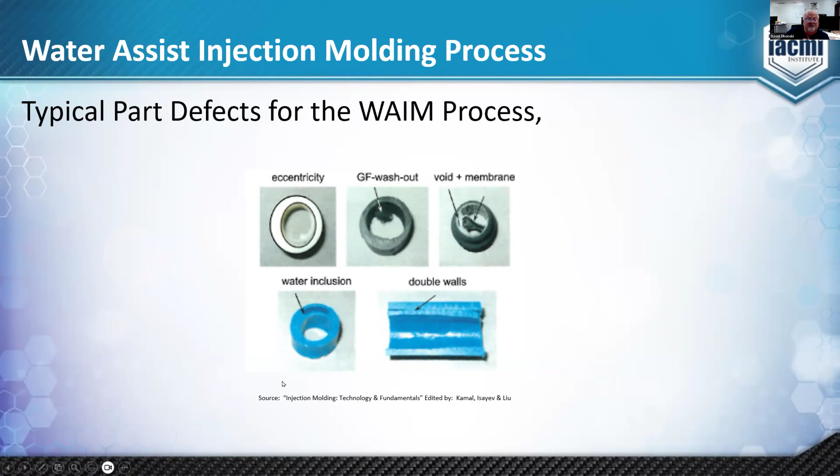The part defects you can see in water assist relate to the concentricity of the hollowed out sections. It's usually very good with water assist, much better than gas assist. If you're using a glass fiber system, you can push fiber out of the material and into the water channel. You can also create double walls with voids or membranes across the water channel, or have water inclusions into the wall of the polymer outside of the hollow section.

With that level set giving you knowledge of the water assist process, I'll go through a case study we did with Ford Motor Company at the scale-up research facility. It was for a cross-car beam. The cross-car beam is essentially the substrate that holds the instrument panel—it is the support of the instrument panel.

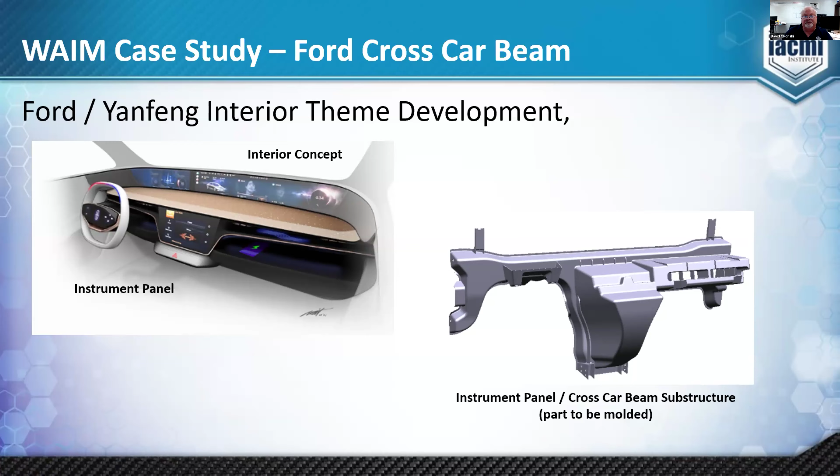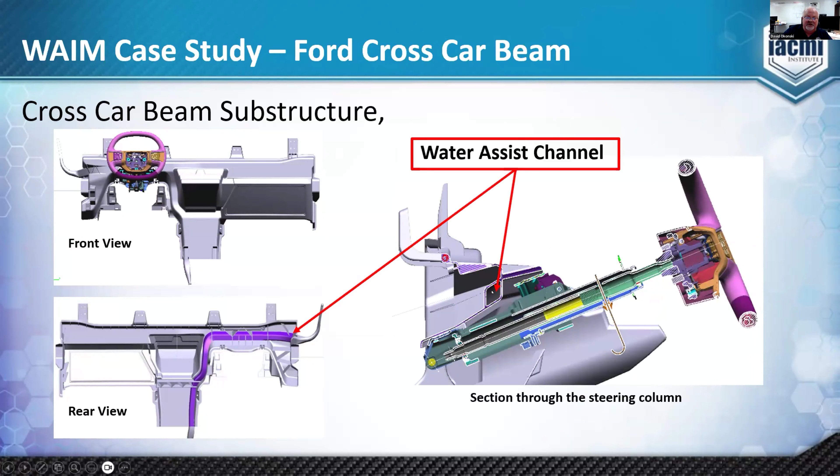The desired effect of using water assist was to hollow out and add geometric stiffness around the steering column. You can see the water assisted channels in this slide, again around the steering column in this location, as well as the previous one.

Complex tool. The whole project was based on a FOA grant, and the idea was to leverage novel materials and processing methods to demonstrate the feasibility of a more weight-efficient design of an instrument panel using localized reinforcements. Those localized reinforcements were a carbon fiber patch placed along the top of the instrument panel, as well as the geometric stiffness added with the water assist hollow channel.

The targets for the program were a mass savings of greater than 40% compared to a conventional steel cross-car beam, which for Ford typically comes in at 15 kilograms. The allowable cost penalty—because we're adding more functionality than a conventional steel beam, meaning added cost in hopes of saving mass and production cycle time—was to come in under $6.60 per kilogram, and we were targeting a cycle time of less than 180 seconds.

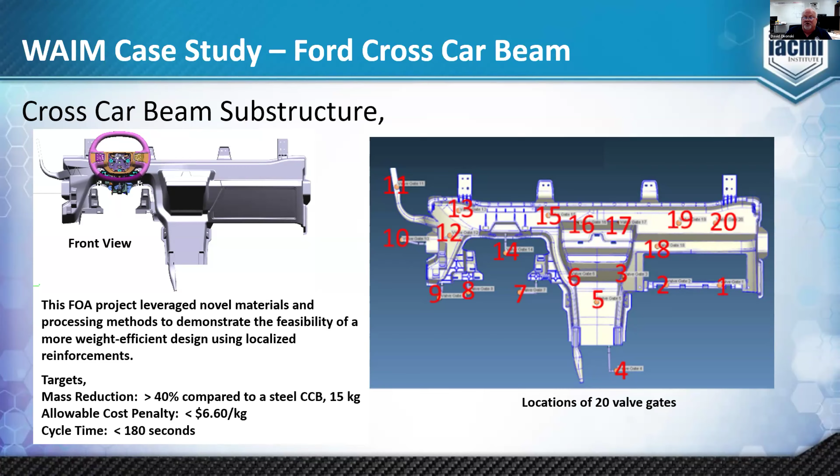The tool was complex, more complex than it needed to be. There were 20 valve gates incorporated in the hopes of demonstrating future technologies and molding techniques beyond the current project. Here's what the actual tool looked like.

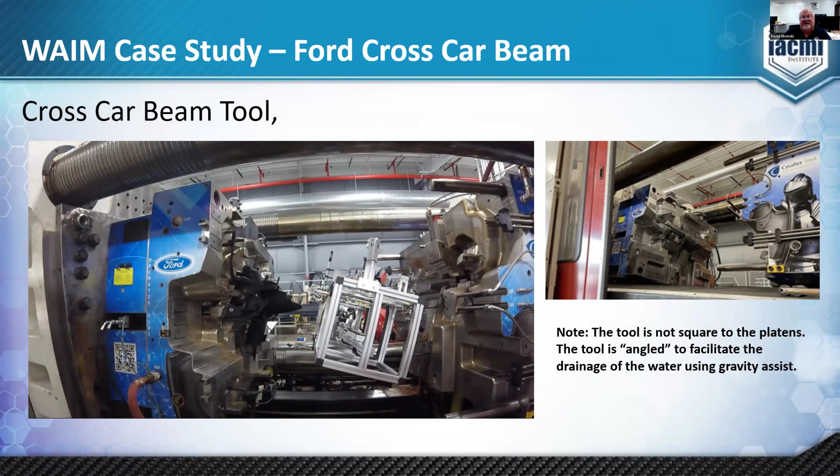The water inject system was in this location, and water entered the part through this channel. You'll notice the tool is not set square to the platens of the press—this was a 3,000-ton Milacron press used to make the part. It was angled to allow us to use gravity assist to drain the water during screw retraction, which facilitated water removal.

What were we able to accomplish? In this program, the water assist used the full shot process sequence with a pull pin water injector and an overspill cavity that pushed the core of the hot melt core material into a puck. The initial process setup was established using a glass-filled polypropylene, then transitioned into a 40% glass-filled nylon part. The valve gates, the 20 valve gates, were cascaded from left to right—cascaded flow is employed to push the melt front across the part, again from left to right.

Approximate fill time was 6 seconds.

We were consistently able to hollow out the channel around the steering column, and we saw good part-to-part mass variation with the production intent material, which was a combination of carbon fiber and basalt glass fiber. In that case, the part came in with a variation of 0.9%. Typically you like to see that below 1% for an injection molded part.

We had much more variation in the runners and the puck. If that's okay, that material was reclaimed, reground, and put back into the process stream.

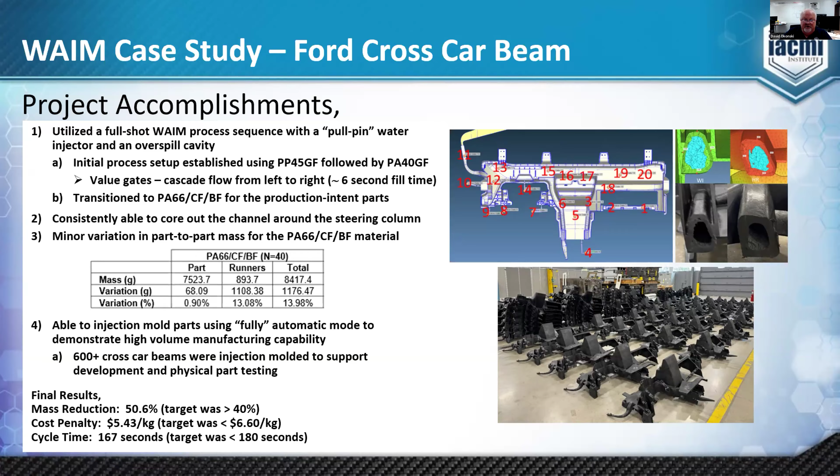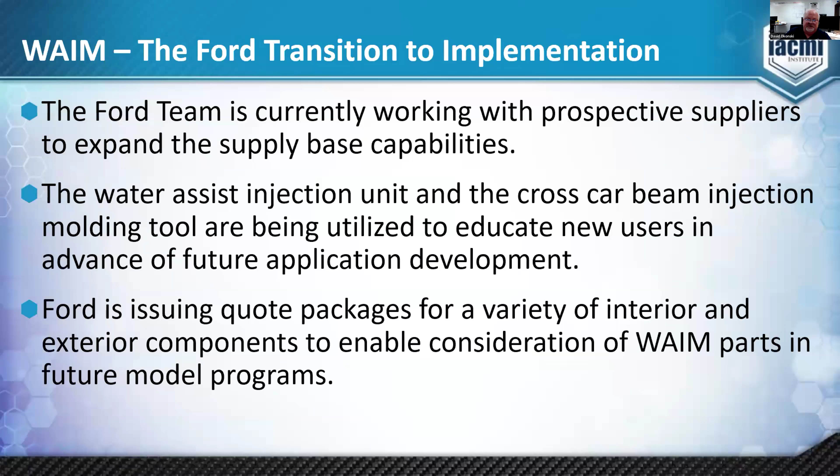Currently, the Ford team is educating the supply base. They're creating a supply base, using the water assist unit and this particular production intent tool to educate suppliers, and they're issuing quote packages for a variety of parts, both interior and exterior, for consideration for their water assist injection molding process in future programs.

So with that, I say thank you, and I'll take your questions.